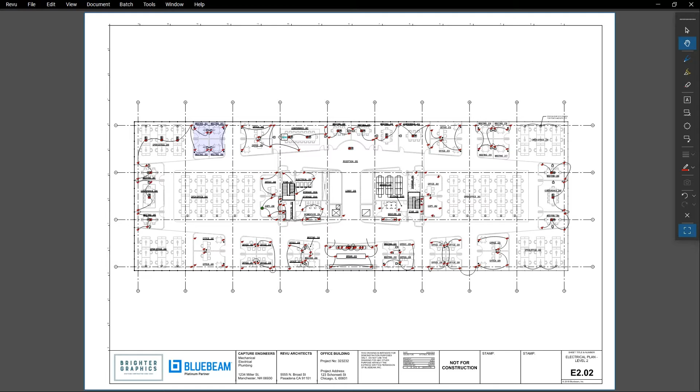Let's get started. In this video, we are going to show you how to use the Links panel in Bluebeam Revu. The Links panel is another place that lets you add links to your drawings. You might not see that it has a set of links at first glance. Open the Links panel on the left. Here, you can review, modify, and delete hyperlinks all in one place. It also features any places you may have set up in your document.

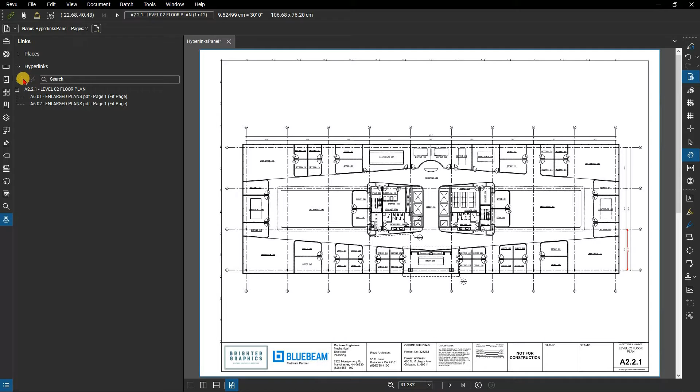You can see under the Hyperlinks section, there are two links under the top-level Organizational tab. Click on the link icon to create new links, and this will give you a crosshair cursor to draw a hyperlink box on your document. You can also edit the link's action from this icon in the Hyperlinks section and search through your links for relevant information. This is especially useful when you have a lot of links. Should you need to delete a hyperlink, right-click on it in the panel and select Delete.

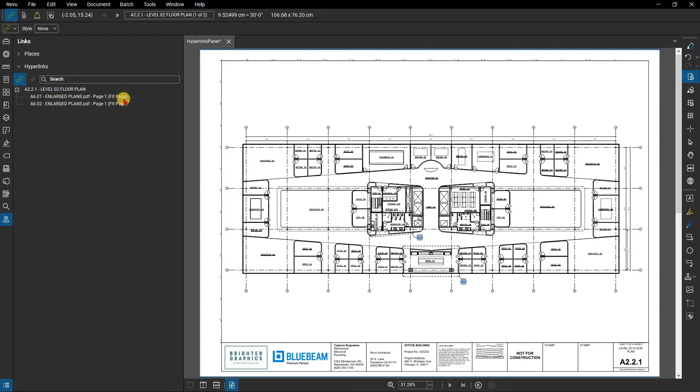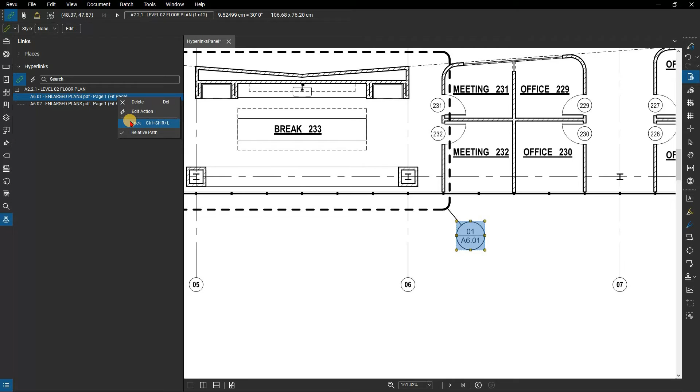We will click on the A601 link. All links on the page are highlighted and the selected hyperlink becomes editable. You can actually modify the hyperlink's control points if you wanted to make it a bit larger or smaller. When not working over an existing hyperlink, the crosshair cursor appears, allowing you to add more hyperlinks. Right-clicking on a link in the panel gives you another place to edit as well as that delete option, and then the option to lock the hyperlink to prevent changes.

Anytime you're adding a hyperlink over text, Revu allows you to select that text with the cursor and add a hyperlink to that exact text. You can add hyperlinks in a similar way by going to Tools in the menu bar, then Hyperlink. Define the parameters of your link and click OK to add it.

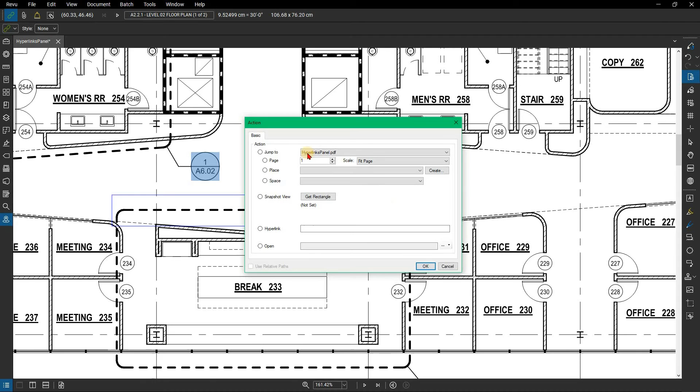Hit Escape, and now that you're no longer editing hyperlinks, you're able to click on them. However, there are no visual cues that there are hyperlinks on the page. By default, hyperlinks are only visible while editing. You have to mouse over them to see where they are when your cursor changes, or use the Links panel.

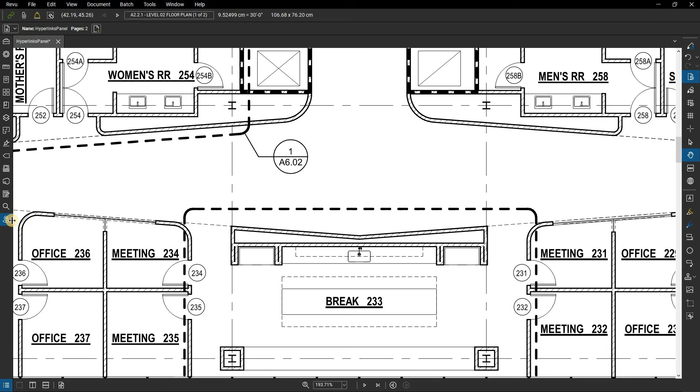With the Links panel open, you can right-click on a hyperlink and choose Properties to edit it. Under Appearance, select Visible to show the hyperlink and assign visual properties like line color, width, and style. Add a red color, and select a line width of 3, and a style of underline. Like with other markups, you can set this as the default properties for all hyperlinks by clicking Set as Default at the bottom of the panel.